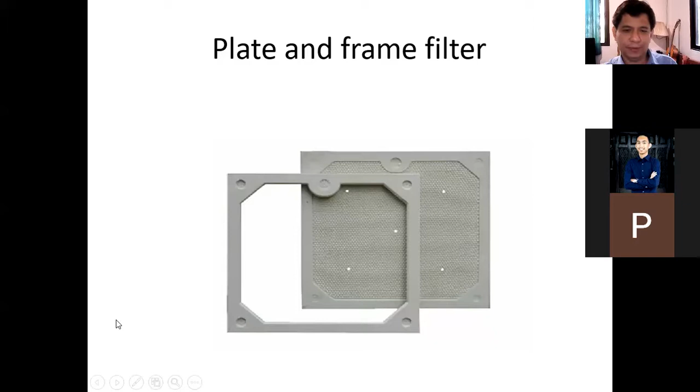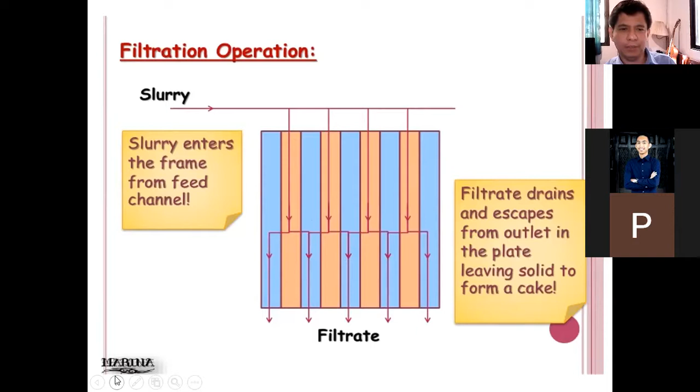In some operations, you need to wash the solid kasi yung solid yung product. Pag washing, generally dun lang sa isang frame pumapasok tapos dun sa isang frame lumalabas. Isang frame lang yung pinapasukan tapos yung isang frame nilalabasan, this is the washing operation. Meron tayong tinatawag na non-washing plate. Yung washing isang direction lang siya, hindi siya nagsasalubong, tapos lalabas siya dito sa ilalim nung plate. Papasok siya dito sa isang side tapos lalabas siya dito sa isang side. Mamaya makikita nyo, mas mabagal yung washing, yung rate ng washing mas mabagal kaysa dun sa filtration process. Mamaya makakalculate tayo ng time, makikita nyo yung formula dun sa washing, times 1/4 nung filtration rate. It's because yung originally yung filtration, you are using 2 plates, pero pag washing na, you're just going to use 1 plate. So mahahati yung area, ganun yung explanation nun bakit mas mabagal pag washing.

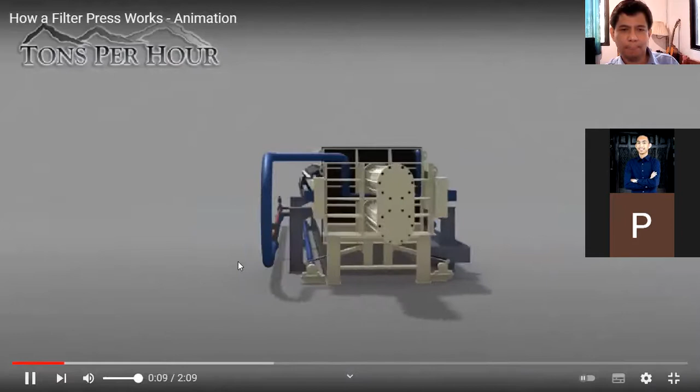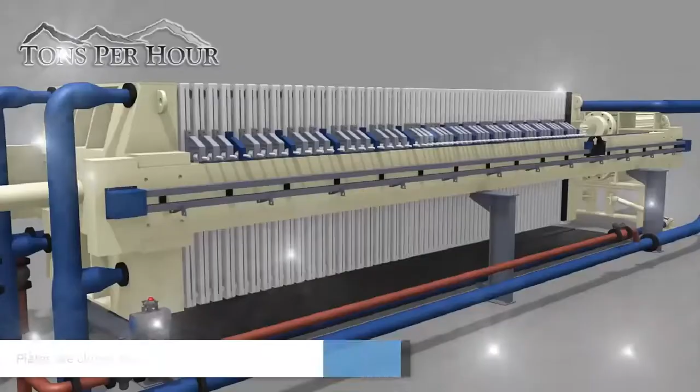So this is the plate and frame filter. Ayan, simula ng filtration, papasok na yung slurry. And then as you can see, the solid will deposit on the frame. Tapos yan na yung filtrate. Ayan, may solid na yung...

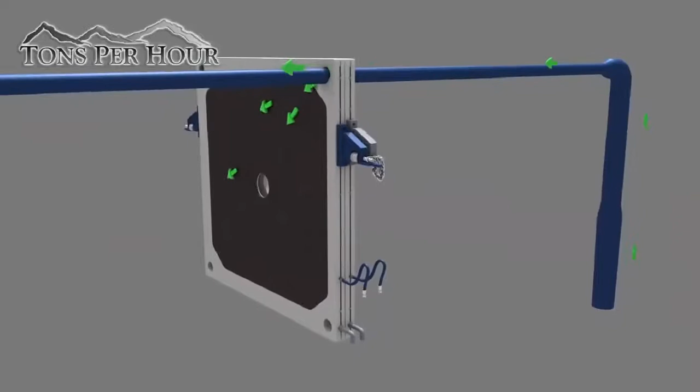I think this is the washing part, ito na yung washing. As you can see, the system is washed. Yung mga solid dun sa tubo, yung mga dumi dun sa tubo natatanggal din. Tapos the last part is the cleaning. This is the removal of the solid deposited on the frame para magamit siya ulit. Basically binubuksan lang. So that's why filter press kasi pinipress siya. Tapos ino-open para malaglag yung cake.

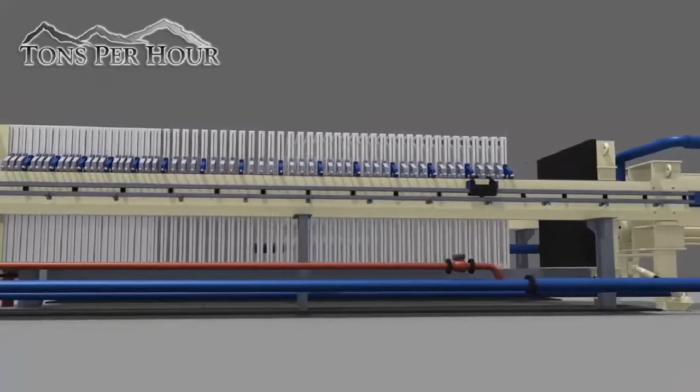Most probably you will see this pag nag-work na kayo sa industry. You will see one, actually meron tayo sa MCL.

Hopefully magkaroon kayo ng Chem-Eng Lab. I think Chem-Eng Lab kayo next term, ano?

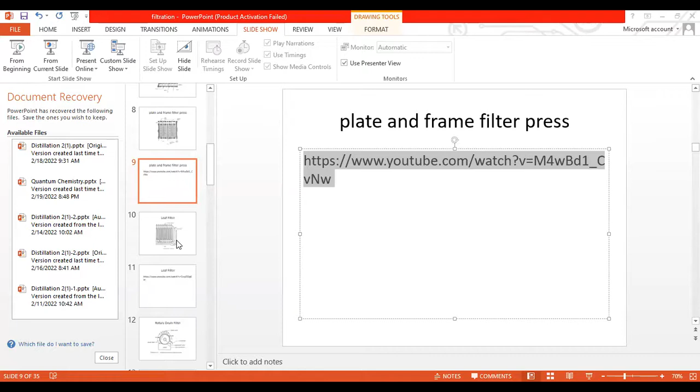Okay, so after the plate and frame filter press, the next most common type of filtration equipment is the leaf filter.

So basically, it's a tank. Tapos inside the tank, you have leaf filters. Basically yung leaf filters, cloth lang sila, tapos sa loob may metal. So yung operation niya, papasok lang yung slurry, papump lang yung slurry dito sa loob ng tangke. Tapos walang ibang outlet. Ito lang yung outlet niya sa taas.

So before you can go to the outlet, you need to pass through the cloth with metal support. Lulusot lamang dito yung liquid, 'di ba? Pag under pressure, if the slurry is under pressure, lulusot lang yung liquid dito sa cloth. There's no way to go out but to pass through these filtrate outlets.

So mamaya magkakalculate tayo ng mga problems sa leaf filter. Ang difference nito, hindi nagdi-deposit yung solid dito sa filter, dito sa cloth. So pag nag-wash, during the washing operation, hindi bumabagal. Wala tayong times 1/4, as is lang. Hindi bumabagal yung filtration process during the washing.

Can you see the YouTube right now? Can you hear the sound? Okay lang ba? Step 1. Remove the plastic wrap from the filter. Open the zip. So this is the leaf filter. Can you see the leaf filter? Place the sweetland leaf filter press inside the press cover.

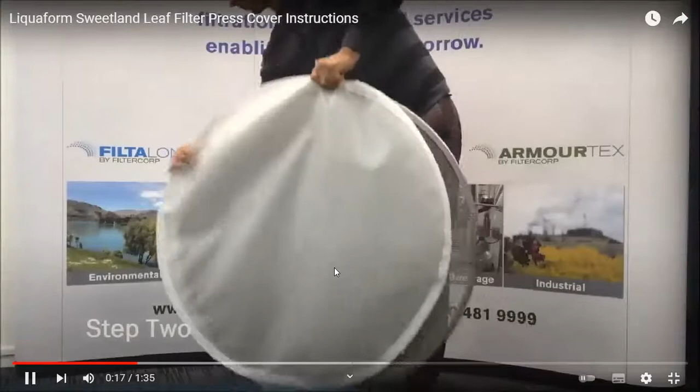So you have several of these inside a leaf filter. Imagine nyo. Step 3. Pinch the edges together to pull the zip around the plate. The zip will be relatively stiff. Ganyan yung itsura ng leaf filter, yung filter niya sa loob.

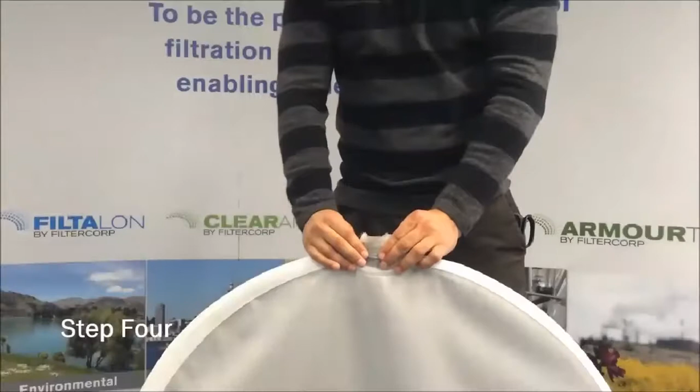Step 4. Pull the material down the spout from the top. So dyan lalabas ito. Secure the cable tie around the filtrate outlet. You are now ready to install your sweetland leaf filter press back into position.

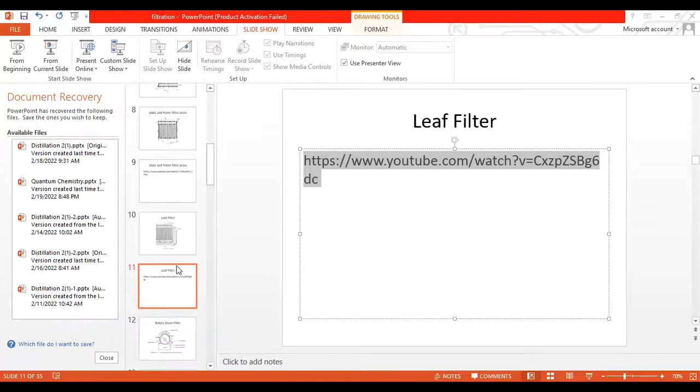Imagine nyo how this equipment work. So basically, yung pinakita ko sa inyo na sa YouTube, you have several of the leaf filter installed inside the tank. So when the slurry goes inside the tank, it's under pressure. So there's no way for the liquid to get out of the tank. It needs to pass the cloth before it gets out to the filtrate outlet.

Okay, so notice that generally hindi yung solid magdi-deposit dun sa cloth. Generally nandito lang yan sa ilalim ng tank. Kaya mamaya makikita niyo yung formula ng leaf filter iba dun sa formula sa washing, iba dun sa formula ng frame and plate. Do you have any question?

Okay pa ba? Interested pa ba kayo sa mga equipments? Actually, syempre, sa industry, makikita nyo pag nasa industry na kayo, doon talaga napoproduce yung wealth. Nung nasa Wyatt pa kami, merong bulletin board na nakalagay doon kung magkano yung napoproduce naming product per month. Relatively, pag tiningnan mo yung planta, ang liit-liit lang, tapos 300 lang ata yung empleyado, kasama na yung sales, kasama na yung mga nagbebenta. We're producing parang ₱1 billion worth of product per month. 2007 pa yon. So nung umalis ako, nag-expand sila, parang dinoble pa nila yung capacity. So ganun kalaki actually yung napoproduce ng product nung mga planta. So I hope you're still interested with this equipment.

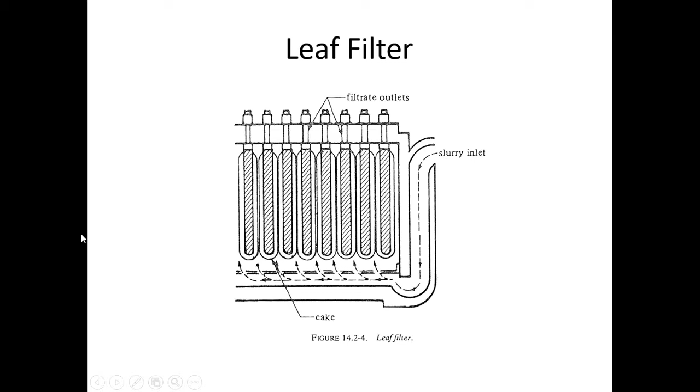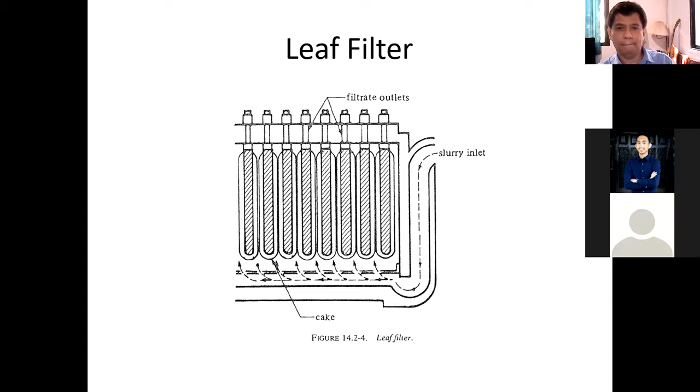Sandali. Do you have any question? Delivery po? May babayaran? Do you have any question regarding the filter? Okay, kung wala, let's proceed.

Question regarding rotary drum filter? I hope manood ulit tayo ng video para mas ma-imagine niyo.

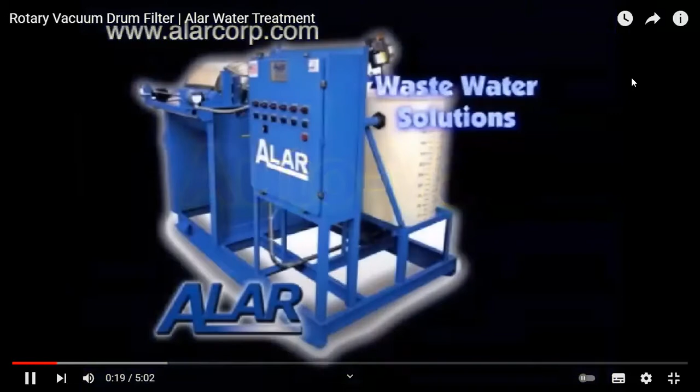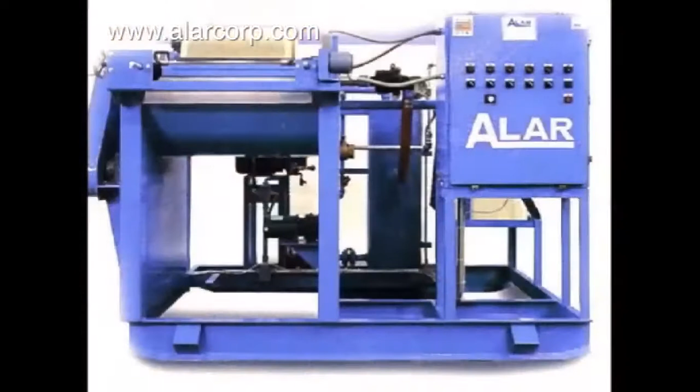One of the most common needs in today's manufacturing environment is sludge dewatering and meeting discharge limits. Alar's AutoVac system effectively removes solid particles from the sludge, producing dewatered dry waste. Typically, this waste is disposed of at a local landfill without further drying. The Alar AutoVac filtering system is skid-mounted, pre-piped, and pre-wired for easy installation.

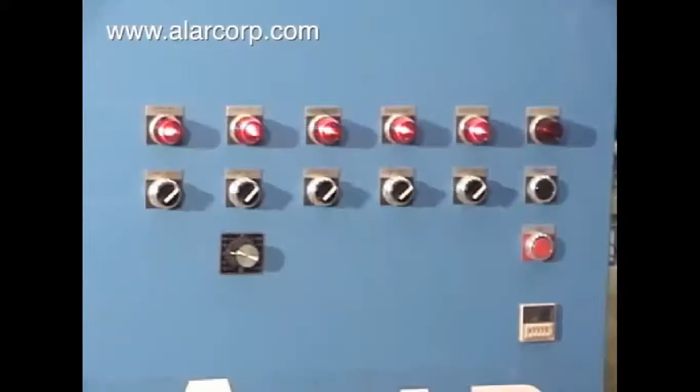It is offered both with semi-automatic and automatic modes of operation. This design works with virtually any industrial waste, such as coolants, cleaners, and process water.

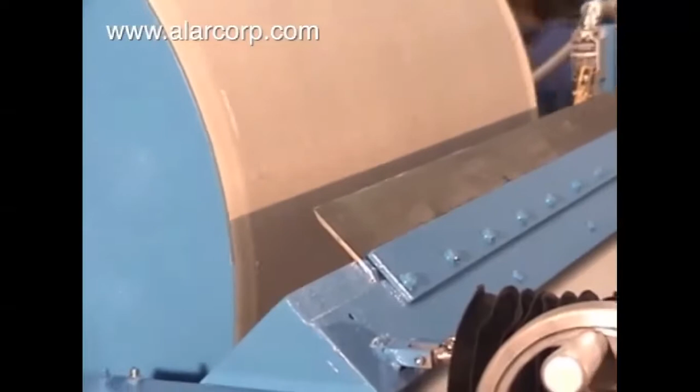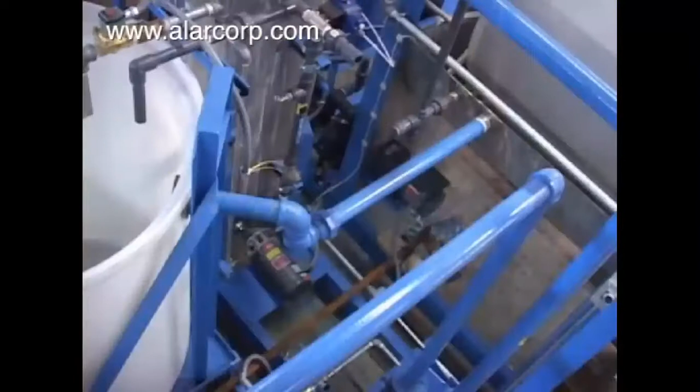The operation of this Alar Autovac filter is semi-automatic. The operator charges the pre-coat tank with filtering media called diatomaceous earth, or DE. The DE slurry overflows into the filter pan, and the vacuum draws the DE filter media onto the cloth.

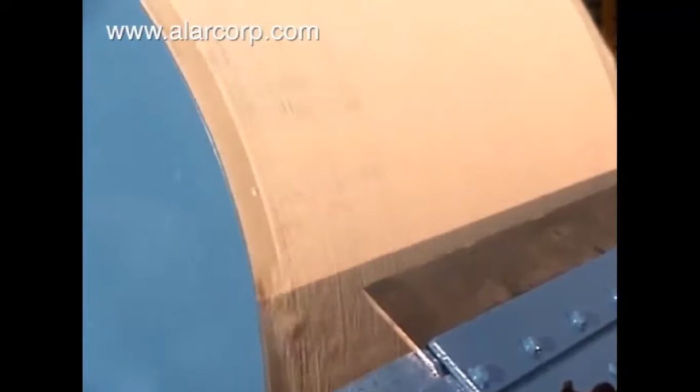This pre-coat operation takes about 15 minutes and is performed with each shift, building up a 3-inch cake.

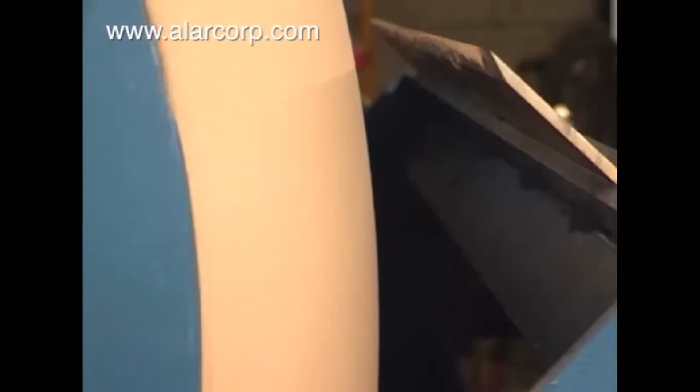The water passes through the DE media and out a hollow shaft. This DE media is capable of removing particles as minute as 1/2 of a micron. That's 1/2 of 1/1000th of a millimeter.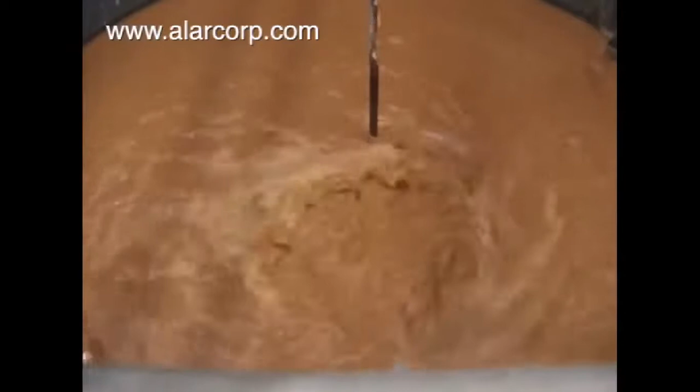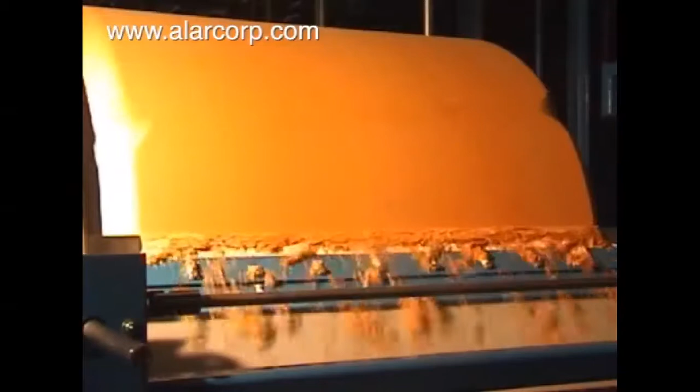Filtering is performed in much the same manner as pre-coating. The wastewater is pumped into the pan. The level controllers located within the pan maintain a constant liquid level, eliminating the need for operator attention.

The vacuum draws the liquid through the DE media and out the shaft. The solids are trapped on the surface of the diatomaceous earth, where they are air dried for 2/3 of a revolution of the filter drum.

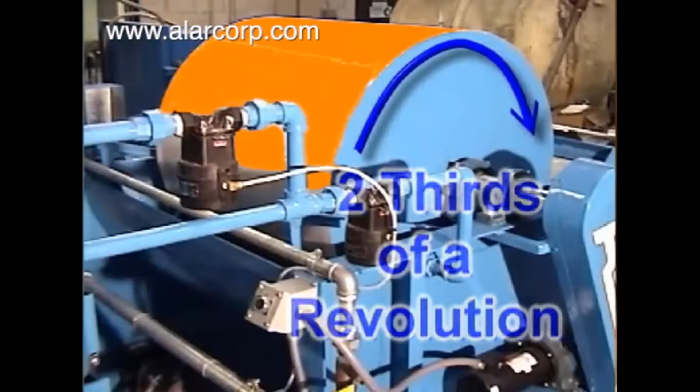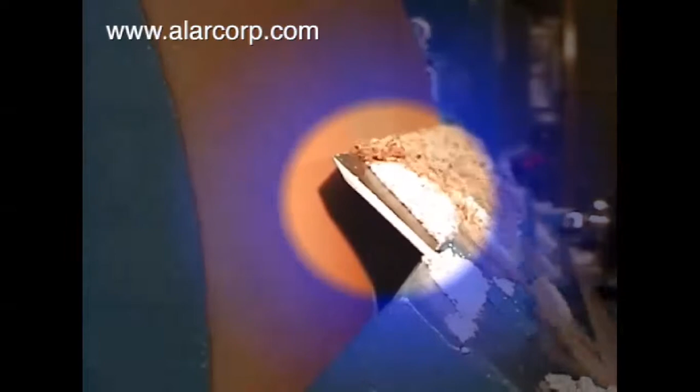This process removes virtually all of the free moisture by drawing an amazing vacuum of 26 inches of mercury. These solids are continuously removed from the surface of the cake by an extremely durable stellite knife blade, advancing with lathe-like precision, leaving a clean surface as the drum re-enters the sludge.

The Autovac is self-cleaning with every revolution, which prevents blinding or clogging and provides rapid filtration and extremely high filtrate clarity.

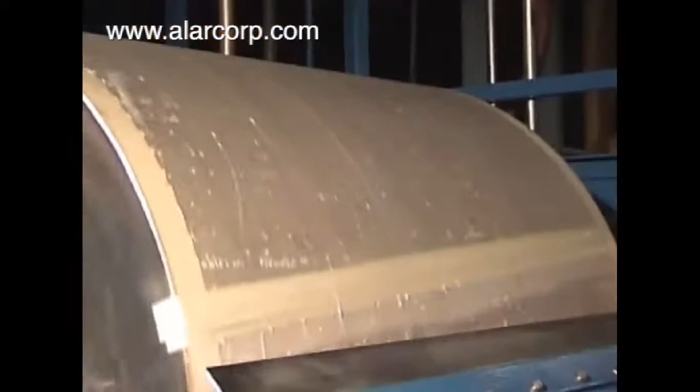After a long day of continuous use, the DE will be exhausted, and the Autovac is now ready for quick and easy cleanup. Cleanup is performed by activating the water nozzle on the Autovac spray bar. The cleanup water is minimal and is filtered with the next batch.

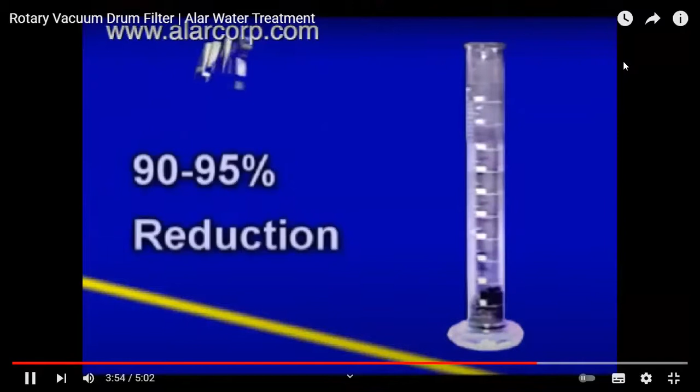With an automatic option, the Autovac can repeat the pre-coat process and go back online or shut itself down. From start to finish, the Autovac is designed for ease of operation with minimal manpower required, providing remarkable results. The Alar Autovac substantially reduces operation and disposal costs by typically achieving reduction in volume of 90 to 95% and producing landfill-ready solids. For a no-cost, no-obligation wastewater filtration.

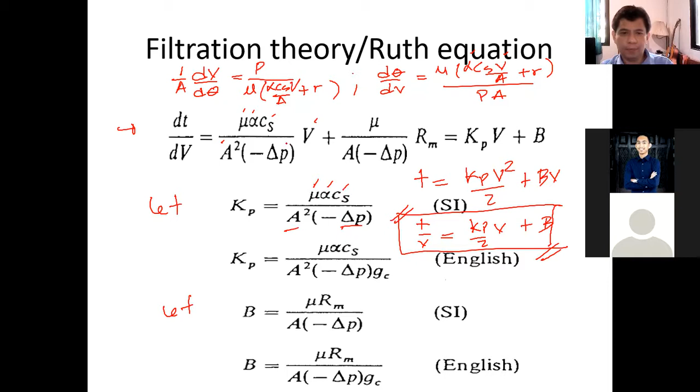You got the idea? So basically, ito lang yung formula natin: T over V is equals to Kp over 2 V plus B. Okay pa ba kayo? Sige, mag-solve na tayo ng problem. So this is example 14.2-1, evaluation of filtration constant for constant pressure filtration. Most of the filtration is constant pressure. Halimbawa yung open lang sa atmosphere, that's constant pressure. Yung ginagawa natin sa lab, that's constant pressure.

So data for laboratory filtration of calcium carbonate slurry in water at 298.2 Kelvin, 25 degrees Celsius, are reported as follows at a constant pressure delta P of 338 kilonewton per meter squared. That is kilopascal. So the filter area of the plate and frame press was A equals 0.0439 meters squared. And the slurry concentration was C sub S 23.47 kilogram solid per cubic meter. Yun yung concentration ng slurry.

Calculate the constant alpha and RM. Ano nga yung constant alpha? So alpha is the resistance of the solid, RM is the resistance of the media. Yun yung pinapahanap sa problem. From the experimental data given, where T is time in seconds, and V is filtrate volume collected in cubic meter. So how do we solve this problem?

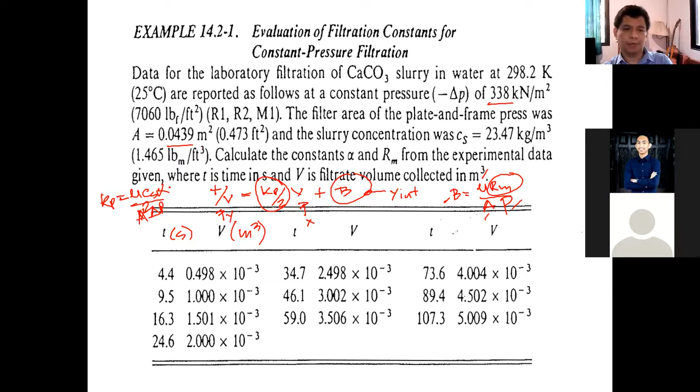So yung Kp, mu CS alpha over A squared delta P. Anyway, hindi ko memorize, tingnan na lang natin mamaya. May A pala dito, may A squared delta P. Ganyan yung Kp. So, that's how to solve this problem.

So, the first thing you need to do is mag-linear regression kayo. Yung X natin would be itong mga V. Ipasok nito sa calculator nyo. Marunong pa kayong mag-linear reg sa calculator? Mode, kung naka-Classwiz kayo, tapos pindutin nyo lamang yung 6. Tapos itong V, ito yung magiging X. As is yan, cubic meter yung unit niya.

Tapos yung Y natin ay T over V. So for example, ang unang Y natin ay 4.4 divided by 0.498 times 10 to the minus 3. And so on. Halimbawa, 9.5 divided by 1 times 10 to the minus 3. Kindly get your calculator tapos hanapin natin yung slope. Medyo madami, we have 10 pairs of data. Sa board exam, maraming linear regression problem. Dapat marunong kayo mag-linear reg sa calculator.

So mode 6, pasok niyo yung mga data. Yung X muna, 0.498 exponent minus 3. 10 data yung papasok niyo: 1 exponent minus 3, 1.501 exponent minus 3, 2 exponent minus 3. Let's be careful. 2.498 exponent minus 3, 3.002 exponent minus 3. Kailangan medyo matyaga. 3.506 exponent minus 3.

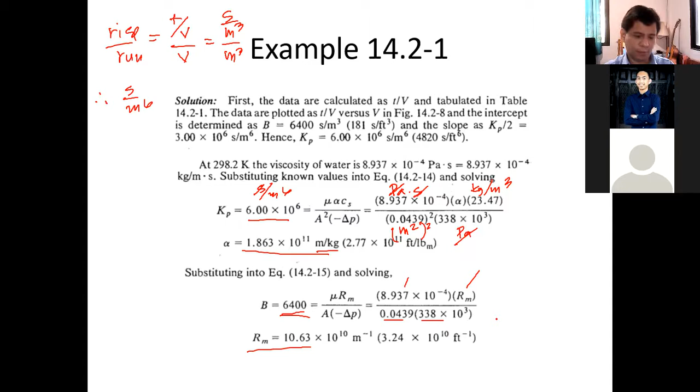8.937 times 10 to the minus 4. Tapos ito yung hinahanap natin, yung resistance ng media. Tapos yung A is 0.0439. Tapos 338 times 1,000 Pascal. So, solve ulit natin yung Rm. Shift solve. 6,400 equal. So, 8.937 exponent minus 4, times the unknown divided by 0.0439 times 338 exponent 3. So, shift solve.

Yan. What do you get for R? Yep. Very good, Paolo. 1.06 times 10 to the 11. Very good, Paolo. So that's the same as 10.63. Inusog lang ng isa yung decimal place. So ang unit niya ay per meter.

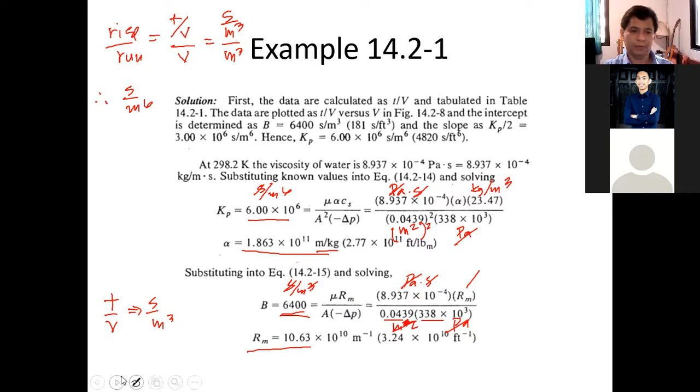Okay, so let's try to solve this second example. The same slurry used in example number 1 is to be filtered in a plate and frame press having 20 frames. Yung unang problem kasi, isang frame lang yung ginamit. Tapos maliit pa yung area niya. So yung sunod na problem, you have 20 frames and then each frame is 0.873 meters squared yung area per frame.

The same pressure will be used in constant pressure filtration, assuming the same filter cake property and filter cloth. Ibig sabihin, parehas lamang yung ating mga resistance, pati yung pressure natin, parehas lang. Lumaki lang yung area, yun lang yung kaibahan, lumaki yung filtration area. Calculate the time to recover 3.37 cubic meter filtrate.

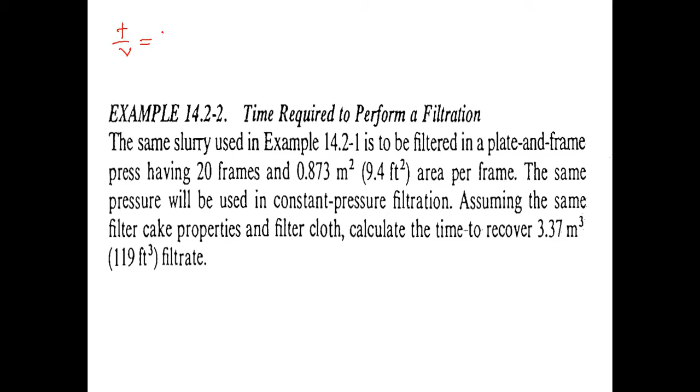So in this problem, gagamitin lang natin yung na-derive nating equation, yung t over V is equals to KP times V plus B. So basically itong volume na to, yan lang 'yon. Tapos we need to find the new KP and the new B. Kasi remember, yung KP na kinalculate natin dun sa example number 1, para lang sa maliit na area, yung 0.04 something meter squared. Eh lumaki yung area natin, 20 times 0.873 na.

Sa equation ng KP, may mu, tapos may CS, tapos may alpha, tapos may area squared, tapos mayroong P. So as you can see, yung KP ay inversely proportional siya dun sa squared ng area. So kung constant yung viscosity, constant yung concentration, hindi magbabago yung resistance ng solid at yung pressure natin, we can say that KP1 times area 1 squared is equals to KP2 times area 2 squared. Ito yung gagamitin nating equation to find KP2.

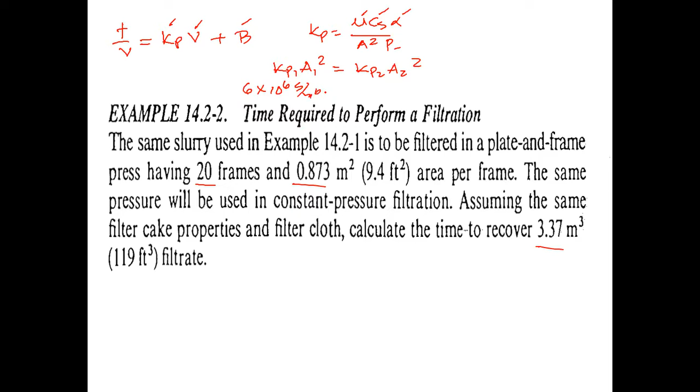Tandaan niyo pa yung KP1 is 6 times 10 to the 6 seconds per meter to the 6. So i-multiply lang natin siya nung A1, I think it's 0.0439 meter squared. Then we can calculate KP2, tapos A2 is 20 times 0.873, squared. Tama, 0.0439. So that's how you can calculate KP2. Use your calculator. Yung KP2 yung gagamitin nyo sa major equation. Same unit yan, seconds per meter to the 6. May squared pa to dito, nakalimutan ko ilagay.

Yep, very good. I think that's correct. Very good, Paul. Okay, squared divided by 20 times 0.873 squared: 37.93. Very good, Paolo. Very good, Gio. Very good, Kissy. 37.93. So this is seconds per meter to the 6.

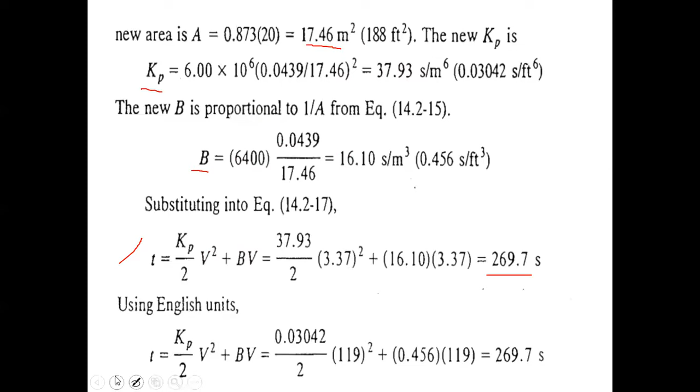Question? Okay. Doon naman tayo sa washing, ano? So kamukha nung kinukwento ko sa inyo kanina, for plate and frame, yung washing bumabagal, no? So, di ba, this is the dV/dt equation. So, the dV/dt is equals to 1 over Kp times Vf plus B. Vf is the final volume ng filtrate na na-recover, ano?

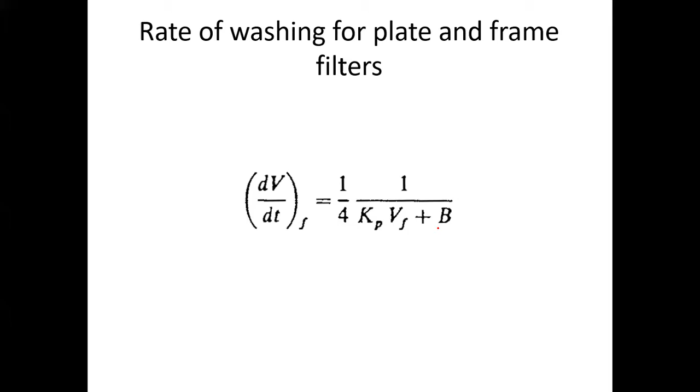Okay, anyway, basically ang problem lang naman dito, ika-calculate nyo rin lamang yung time for washing. So ika-calculate nyo lamang yung rate of washing, dV/dt is the rate of washing using this formula. And then, pag given yung volume, kung gaano karami yung liquid na iwawash nyo, you just basically divide the volume with the rate of washing, and then you will get the time for washing.

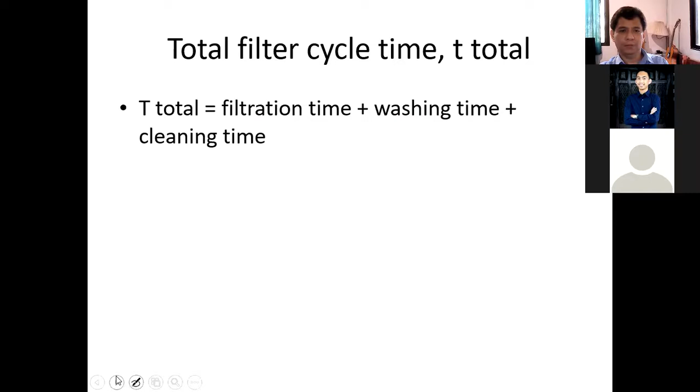Problem number 3, example number 2. At the end of filtration cycle, in example number 2, a total filtrate volume of 3.37 cubic meter is collected in a total time of 269.7 seconds. So, yun na-calculate natin sa problem number 2. The cake is to be washed by through washing in plate and frame press using a volume of wash water equal to 10% of the filtrate volume. So, iwawash nyo siya ng 0.337 cubic meter. Calculate the time of washing and the total filter cycle time if cleaning the filter takes 20 minutes.

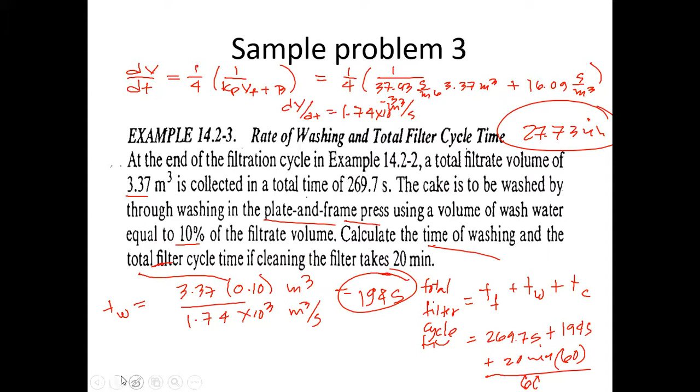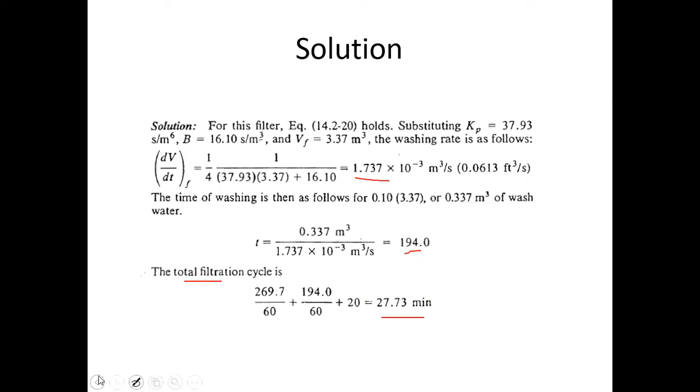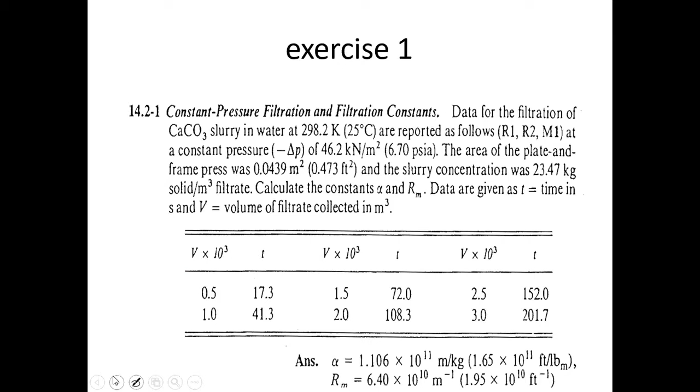If you don't have any question, I have 3 exercises for you. Lalagay ko sa BBL later. So this one, the first one is about calculation of alpha and RM, kamukha nung ginawa natin sa problem number 1. And you have another exercise.

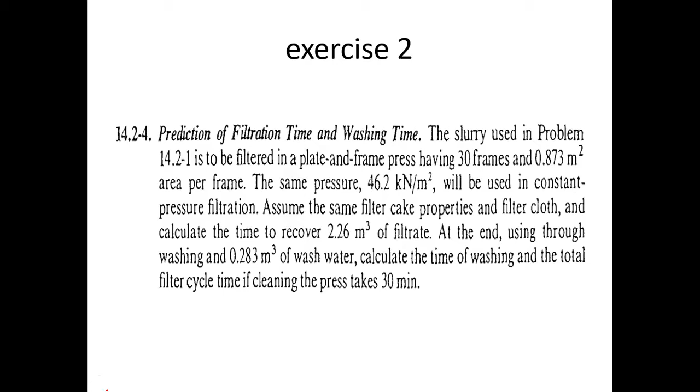This one is filtration time, calculation of filtration time ata. Anda na, this one is parang total filter cycle time, tsaka time of washing. Okay, lalagay ko rin yun later. Tapos another one, another problem. This is a leaf filter.

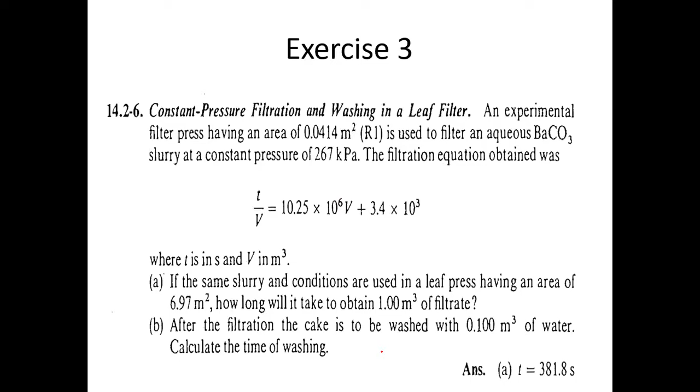Parang sikapin kayong umattend. Although matatapos na yung klase natin. We'll have our last meeting on Wednesday. Siguro discuss ko yung isang membrane set pa, yung heart and lung machine. So we'll meet on Wednesday. Tapos, probably walang pasok ng Friday kasi People's Power. Okay? Sana ma-realize naman ng mas maraming tao na almost miracle ang EDSA. Nasasayangin lang nila. Miracle talaga yung EDSA, ako tingin ko miracle yan. So, anyway, yun yung desisyon na nakakarami. Wala tayong magagawa, kung sakasakali.